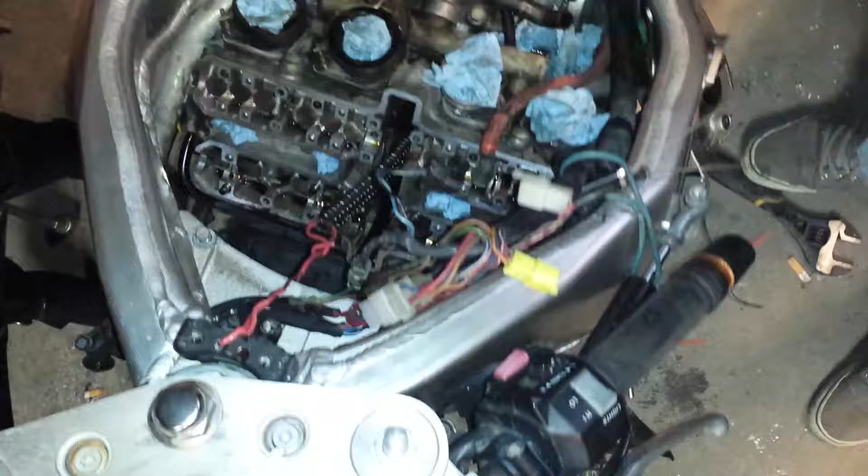Alright, valve adjustments part 3. Got the camshafts pulled off, cam chain. Kept tension on it, camshafts didn't come out too bad. The exhaust was a little tight and I kind of had to pry it out. Wasn't really digging that. But got everything apart, went pretty smooth. It seemed like some of the cap bolts had different torques on them, which I wasn't thrilled about either, but there's not a whole lot I can do.

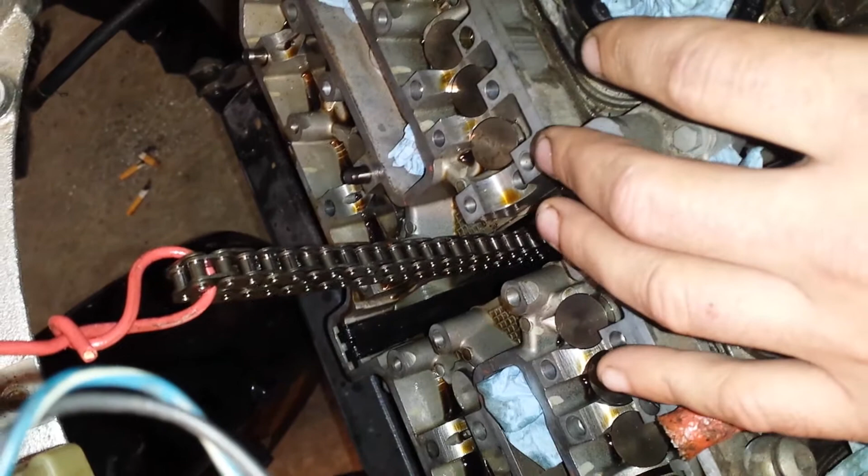So as you're taking everything apart, I started on the intake side. I took both end caps off first. Now in the book it specifies to loosen all the caps evenly 1/2 turn as you go. And the reason for that is they don't want you to break a cap. Because as you're loosening them, there's tension from the valves on the camshaft, so they really stress to loosen them evenly.

But if you want a little bit of a shortcut, you can take each end one off completely, leaving the two inside ones tight, and then the camshaft's still torqued down. Then just loosen these 1/2 turn at a time. Again, as long as you're careful, it'll be alright.

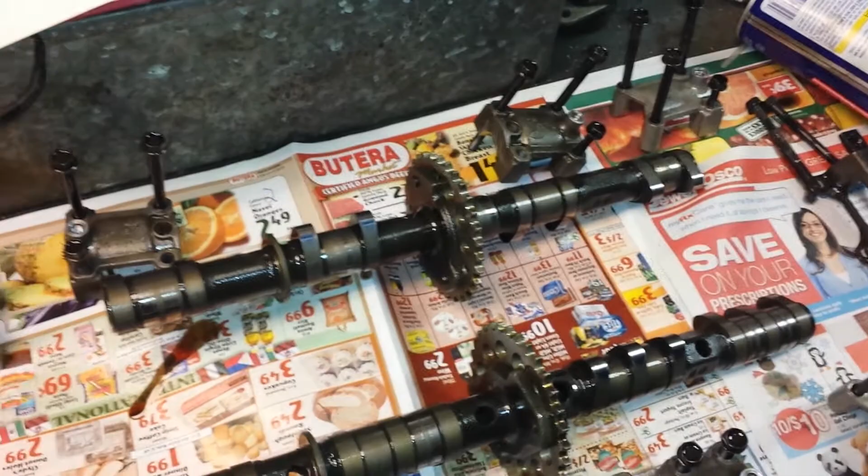But basically, I just took everything, as you can see here, laid it all out on the bench, exactly how it was in the bike. Bolt for bolt. If you care about your bike, you're going to do that. Okay? Don't go mixing up your caps and your bolts and whatnot. If your bike's got 20,000 on it like this, the parts are worn in for that specific spot. But yeah, basically got everything laid out, exactly how it's going to go in.

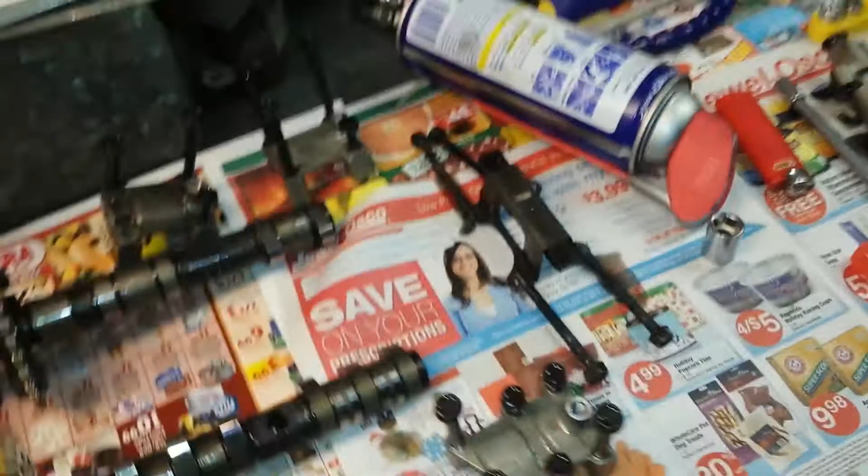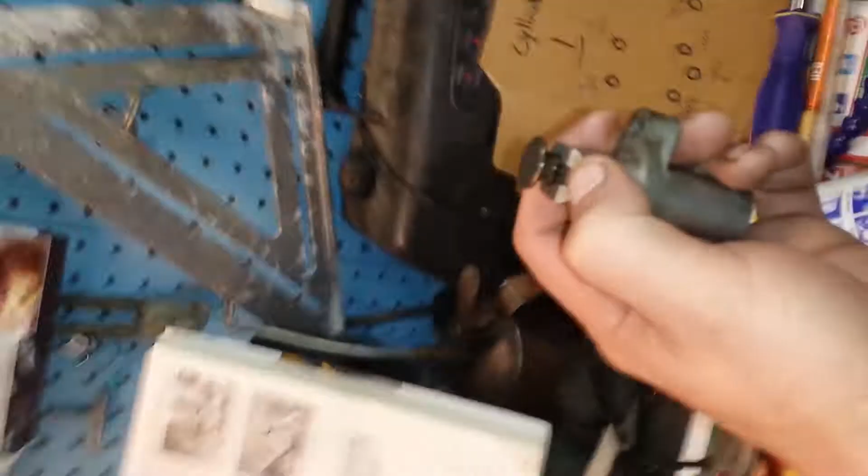Your cam chain tensioner, well, I'll cover that in the next video, but basically I pushed it all the way in. You just press this little tab down and you see it clicks out, can't come back in. So you just press that down, press it down. You're going to want to install it like that.

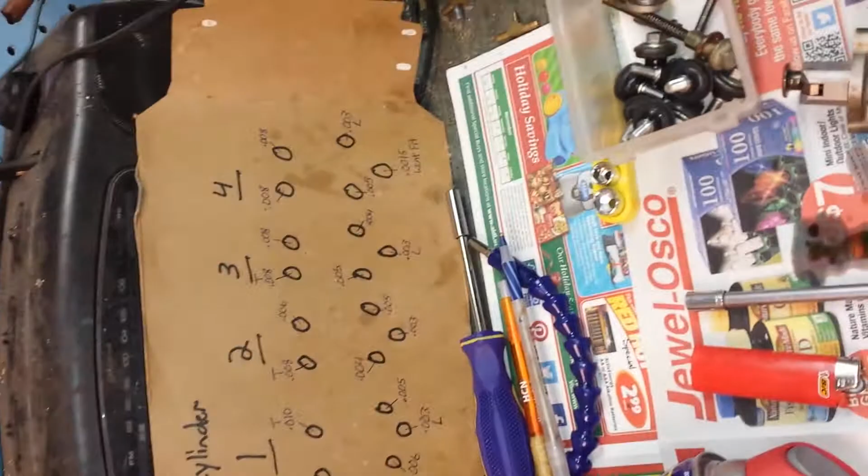Now, as far as actually replacing shims, you should have all your measurements written down like I do here. I'm just going to show you one because it's going to take a long time to go through all of them. But the reason why I'm doing this is I had a slight misfire on cylinder number 4, and I didn't like that. So you see this is out of spec for the intake. I'd like to see that closer to the middle, but I'm going to leave the .0015, and the smallest feeler gauge I had wouldn't fit on this intake valve. Obviously some issues with that.

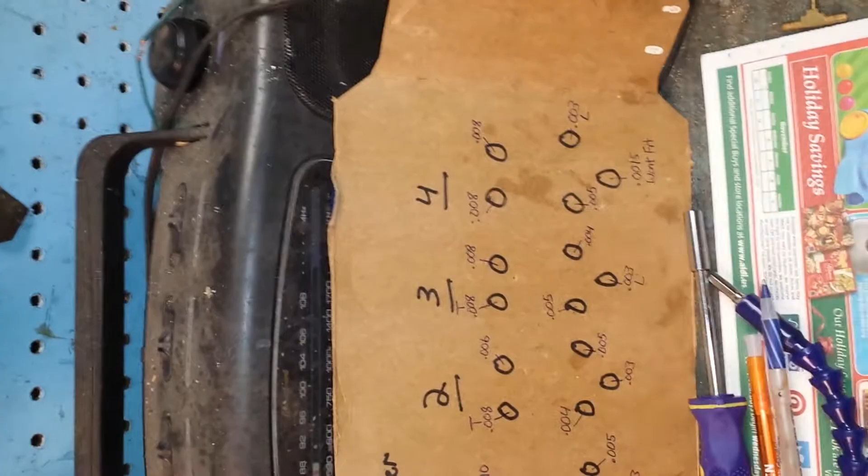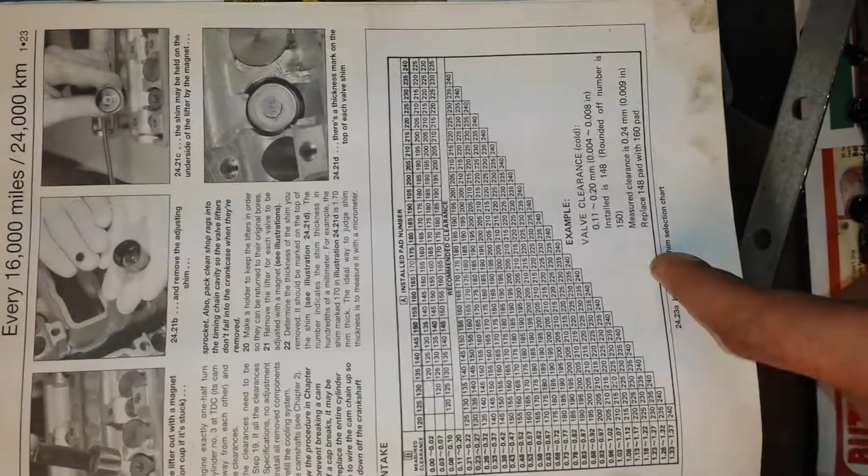Again, at the exhaust, these .008s, that's at the top of your tolerances. It's still within spec though, so depending on the size of the shim, I'm going to leave them in. The book does say when you buy your shim kit, it's going to come in .05 increments. From the factory, they have shims in .01 increments. So you're going to have to round off whatever shim comes out. So I'm going to give you guys a little example here.

Now, as far as taking these valve caps off and the shim out, you're going to need a little magnet. I don't know how I came across this dart from a magnetic dartboard, but just so happen to have it. Your shims are under these caps here. So this was the problem child. I believe this was causing my slight misfire. It was kind of intermittent, but I'm pretty sure that's the cause of it, because I couldn't even get a feeler gauge in there.

But again, you can buy one of those telescope magnets from the auto parts store or whatever you got, but you're going to need these to pull them. So you're just going to go ahead and put your magnet on the valve cap, pull her on out.

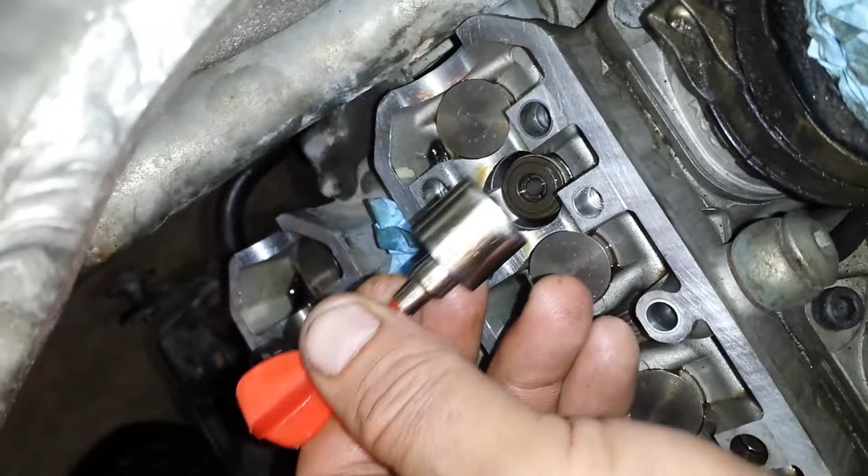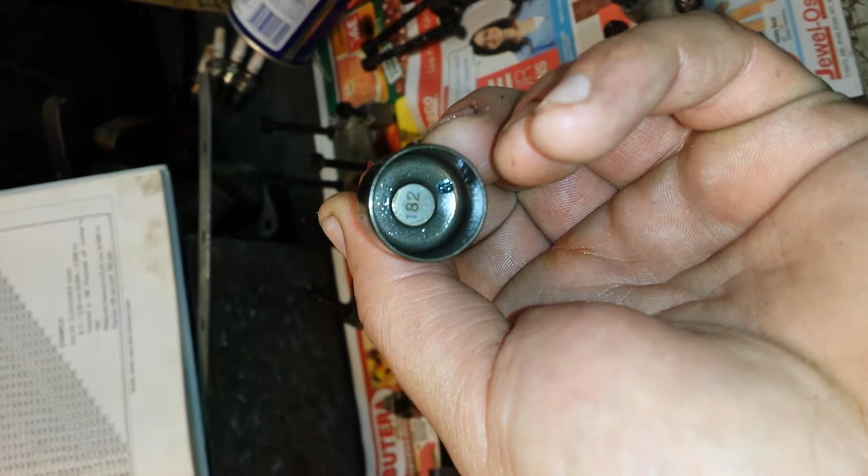Okay, very carefully, you don't want to drop nothing. Okay, shim's in the bottom of the cap. Alright, so let me get a good shot. See, that shim is a 182, alright? So obviously I know that's a factory shim because it's in 0.01 increments. I haven't seen any shims that you can get in 0.01 increments. So anyways, we're going to have to take that 182 and round it down to 180.

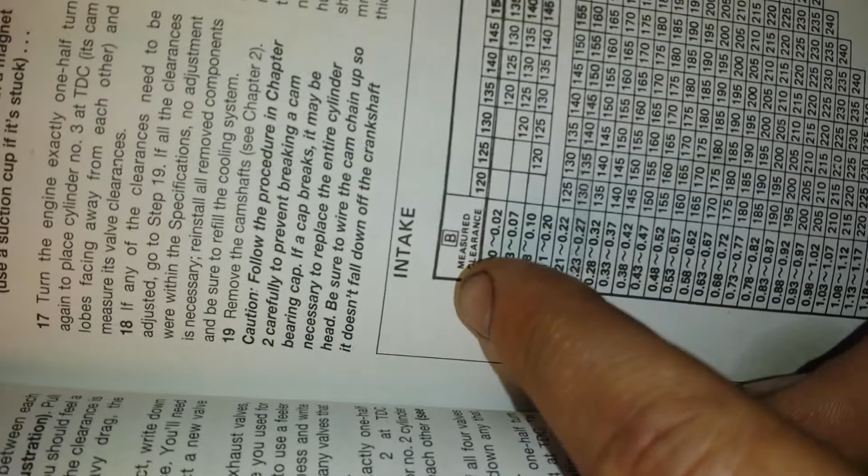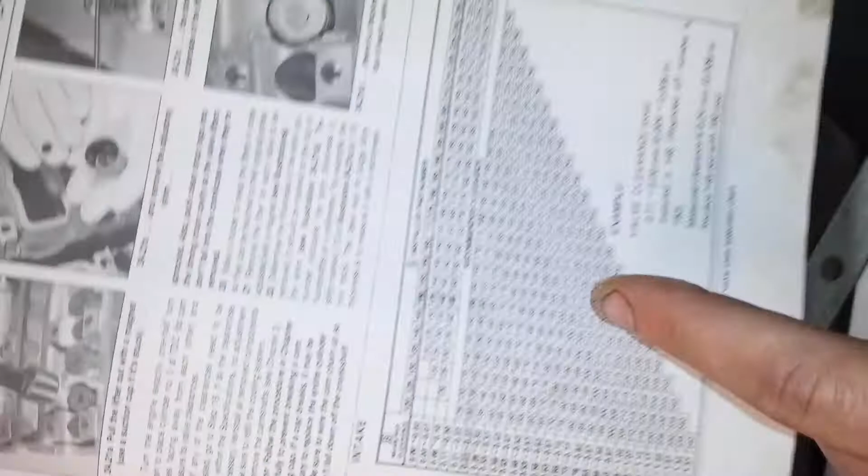So, again, the chart in the book, it's in metric, alright? So your measured clearance on that one I had over here, this is in inches. You're going to have to convert this. I know it sucks. Anyways, so we're going to take the shim size, round it down, 180, right? My measured clearance, 0.00 to 0.02 millimeters. I know it's getting a little confusing. So, shim size 180 with that measured clearance, I'm going to want to install a 165 shim.

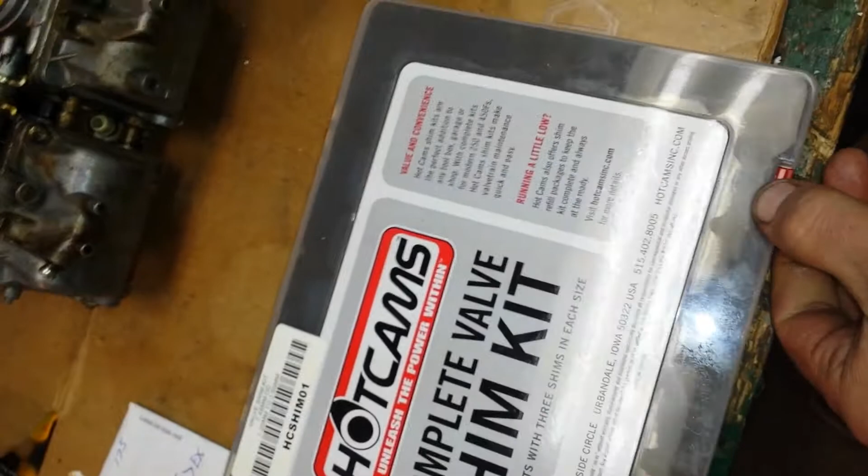And again, you're not going to know what's installed in this unless you take it apart and then order your shims. I got this kit off eBay. It was about 80 bucks. And again, I just bought this because I don't want to be leaving this thing apart, alright? You forget how things go back together, it ain't good. But anyways, 80 bucks, you get a real nice shim kit like this. Got all the sizes, 3 of each.

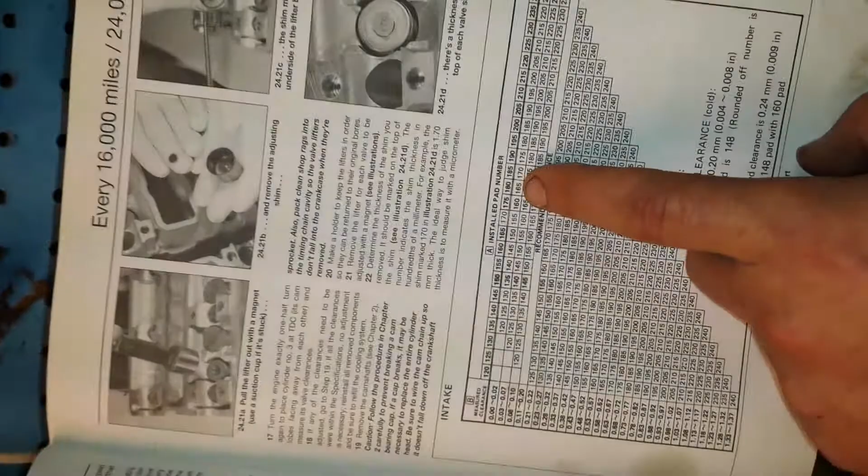So what was it? My shim size was 180 at 0 clearance. It says to install a 165, but I couldn't get a shim to fit, so I may even entertain putting in a 160. You know, I don't know. I'm gonna sit down and have a beer and think about this. But again, the book recommends a 165, so I mean, I don't know. We're gonna have to see.

Again, I don't know how in-depth you're gonna get with this, but I have a micrometer. I plan on miking out the shim that's in here. See how it pulled out real nice like that? That is just excellent. See, pull it right out of the cap. Get a good shot of that. 182. But I got a micrometer again. I'm gonna mic this out. I'm gonna mic out what it recommends, and mic out a 160, and see how I feel about it. I mean, I may have to take it apart again because again, I couldn't get a measurement on it.

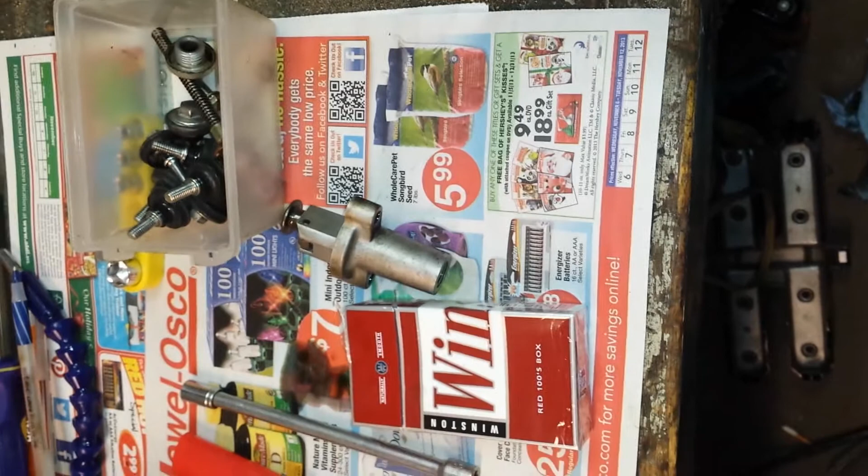I don't know. But for the other ones like this, I measured a 0.003, converted to metric. What is that? That's a 0.076 in metric. So I'm gonna go ahead and round that to a 0.08. Again, we're talking about thousandths. You don't really want to round, but I don't have much of a choice. So I have a measured clearance of 0.08. Alright?

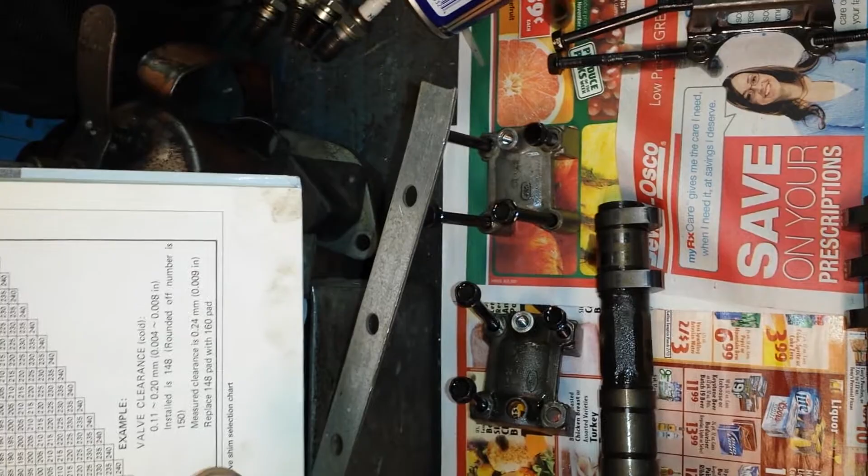And let me pull that valve cap just to see what it is. Alright, we'll leave that one there. Again, you don't want to get these mixed up though. I'm going to do one at a time. I'm just doing this for the video. So I'm going to pull this one out. This is my 0.003 of an inch, 0.08 millimeters. Again, using my magnet, just very gently. Shims in there. Look at that. That is just beautiful. They're coming out that way.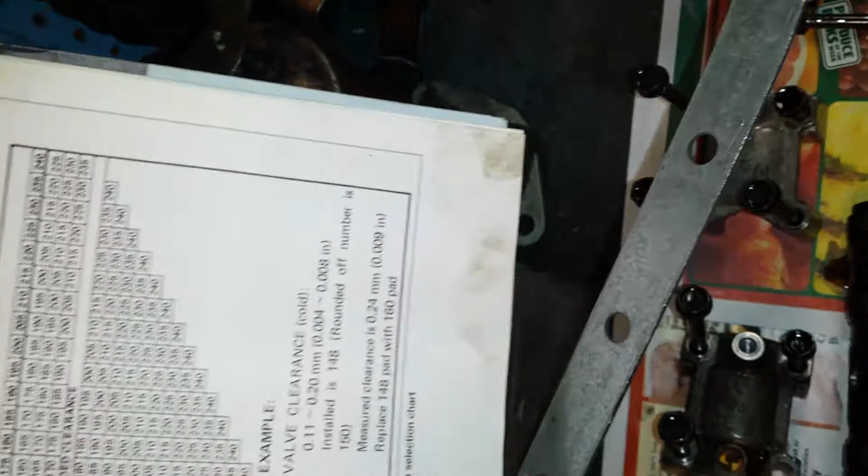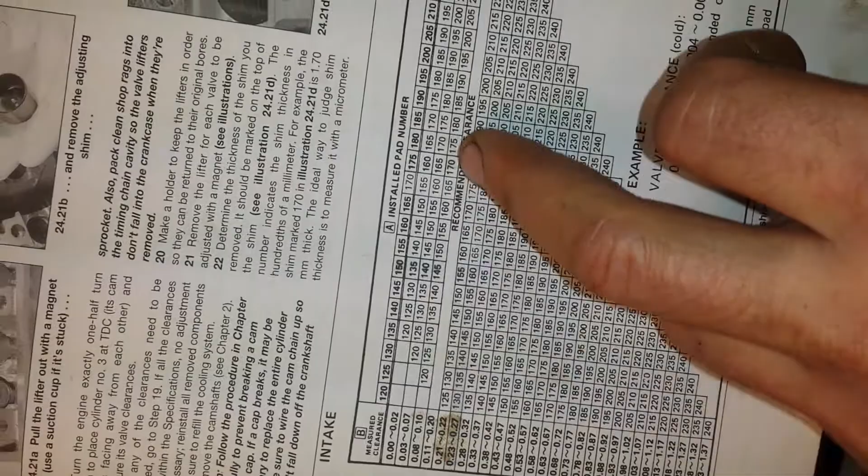Okay. I'm going to pull my shim out. And what do we got there? Don't know if you can, I can't get a good angle with the camera. There we go. A 180 shim. So with a .08 measured clearance, millimeters, I'm going back to millimeters, I'm sorry, I'm probably confusing the fuck out of you, but you'll get a grasp on it when you have to do it. And a 180, shit, sorry book, damn it. Anyways, 0.08 millimeter, it's got a 180 shim.

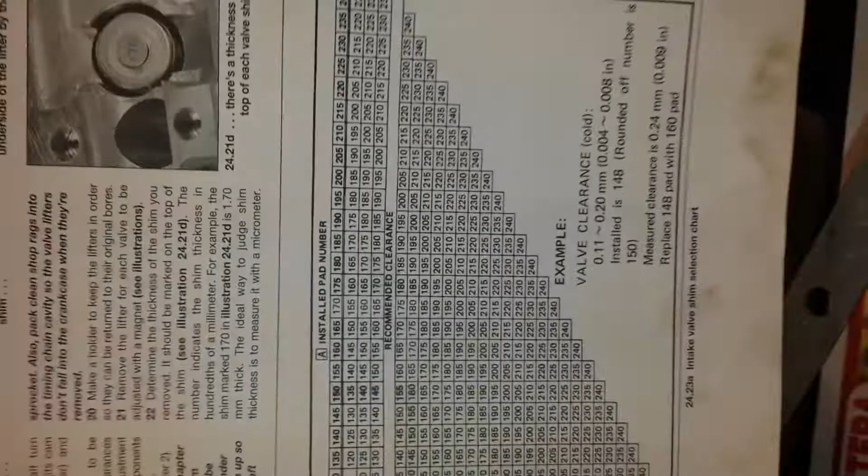It's recommending that I put a 175 in. Sounds good to me. And basically you're going to have all your clearances written out real nice, and you're just going to replace the shims as you go. And that's as far as it goes for that.